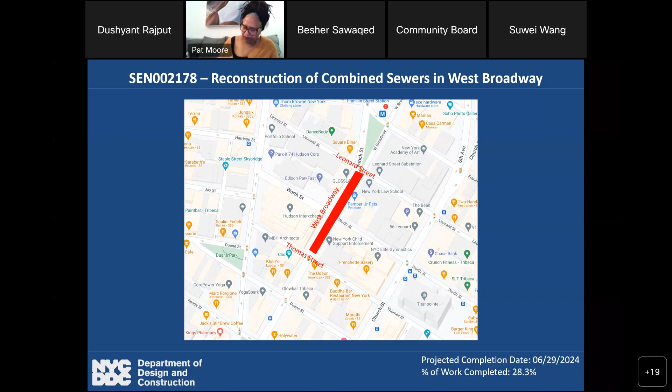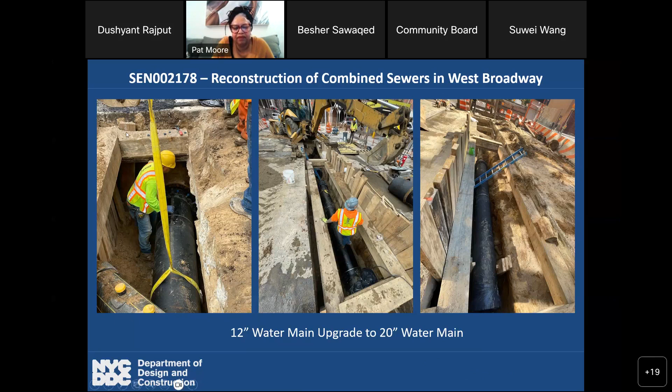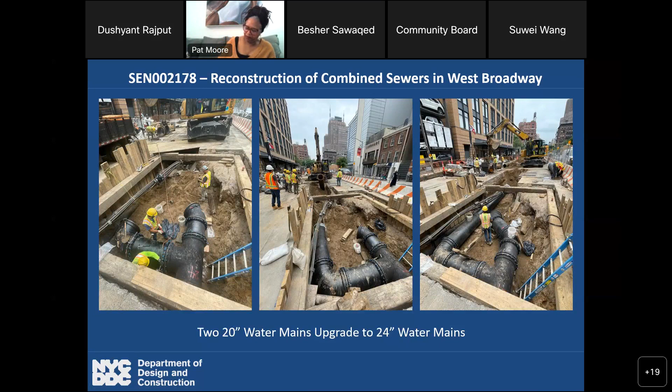Right, next photo. So this slide, it's the same thing. These are 2 20-inch water mains that are upgraded to new 24-inch water mains. So again, larger pipes, more capacity, and the old 20-inch water mains were from the late 1800s. These are more than 100-year-old water mains. This work was all completed.

So this is a plan of the scope of the project. We are actually reconstructing the combined sewers for the 2 blocks. Water main was added as an additional change order work. So as soon as the water main work is complete, we will move to reconstructing the combined sewers, building new manholes, basically from Thomas Street to Leonard Street.

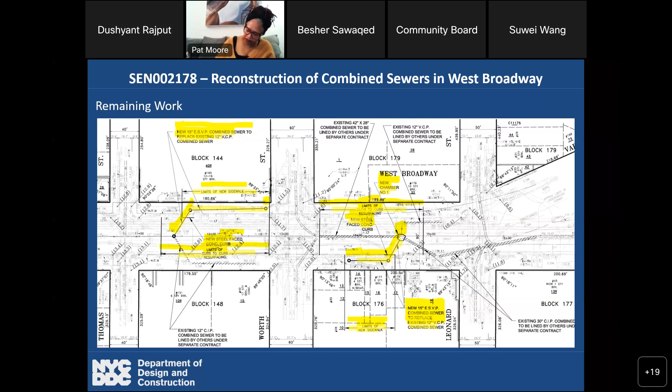Let me see. Yep, next slide. That's it. Okay, so that's it for the West Broadway project.

I have a question for you. When you dug up, did you find anything good? We always... nothing archaeological, no dead bodies. We are all good. Glad about the no dead bodies.

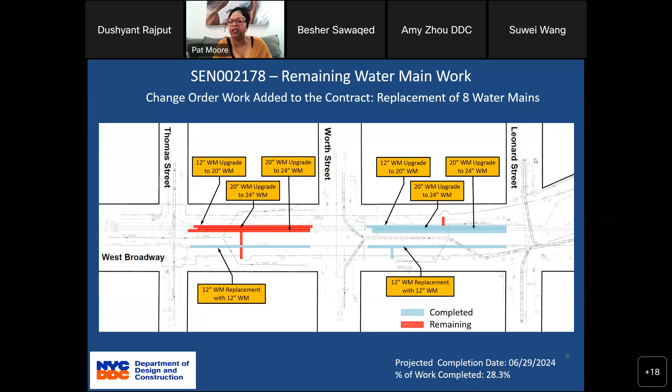Great, thank you. Committee, do you have any questions? I can't see all hands. So Brendan, I see you, go ahead. A couple of questions: are you all on schedule currently? And if not, what are some hiccups that you're running into?

So we have bi-weekly progress meetings with the contractor, and the most recent one was actually today in the afternoon. According to the contractor and everyone involved in the project staff, we are still on schedule for the completion date of June 2024.

Great, and then with the transition to this new block work, are there expectations in traffic transitions? So we are going to keep the existing MPT on the north block, and the contractor will occupy the south block. So we are going to be working on both blocks concurrently. On the north block, there are still some utility work being done by the utility company, and the contractor is going to work on the water main work on the south block.

Great, thank you. Yep, no problem. Anyone else from the committee with good questions, Brendan? Anybody else? And most of the hiccups come when the bad weather comes, right?

Yes, we had a day of delay a couple of weeks ago from the Canadian fire because of the poor air quality. We had to shut down for a day and things like that. And last year we had a couple of days where there was a heat advisory from the heat waves. So in the summer, that's something to look out for.

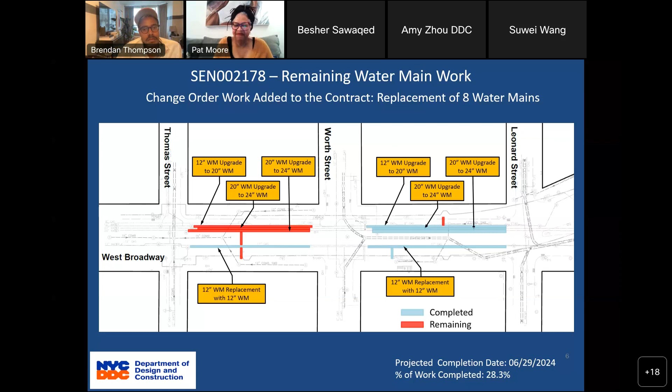Thank you. So who's next and which project? So for the next project, we have reconstruction of Greenwich Street. I believe we have Phillip.

Yes, thank you, Besher. Can everyone hear me okay? Oh, great. So like Besher said, I'm Phillip Stafford. I'm the community liaison for the DDC's reconstruction of Greenwich Street. I'll try to go through the slides quickly and then have a couple other things to touch on.

So this is a full roadway reconstruction on Greenwich Street from Barclay up to Chambers Street. Primarily, most of our work is on Greenwich Street between Barclay and Murray, and that's the only place we're working now. It's a joint bid job, so we're doing all of our water main and sewer work, and also Con Edison and ECS have money in this project to upgrade their facilities as well.

Now let's go down the list. Curb alignment on Greenwich, the west side between Barclay and Murray, the curb will bump out in 3 places, about 20 feet into the street when we're done.

We haven't seen any trolley materials yet. We'll put back the street furniture, new signs, all that good stuff when we're done. Currently installing the water main, new streetlights and traffic signals, and we've done a good amount of the drainage work so far, especially on the east side of the street. And all of this happens while we're working with Con Ed to upgrade their facilities as well.

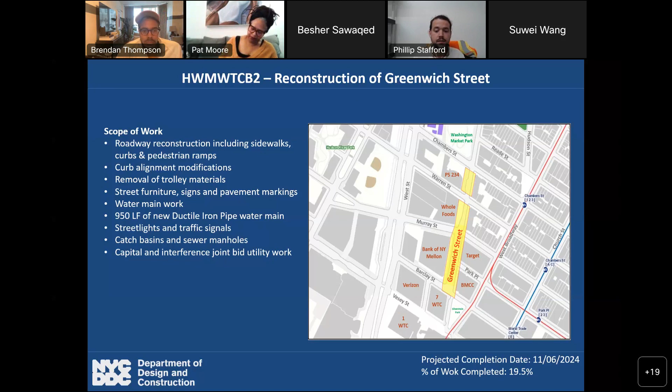You can go to the next slide. So, time elapsed is almost 50%, about 46%. Percentage complete is 19.5% - that always lags a little behind because it's based off of the payments.

For the project schedule, we're working at Barclay and Greenwich - that's a mass excavation area, meaning we open everything up and the utilities do their work and we do what we can around them. Also, we're doing a lot of work for the utilities, our contractor.

Greenwich and Murray Street, same thing - we have a large excavation, currently trying to build a new Con Ed manhole right there. And at Greenwich and Park Place, we just put in the first run of water main, about 150 or 200 feet. It's nice to see that go in.

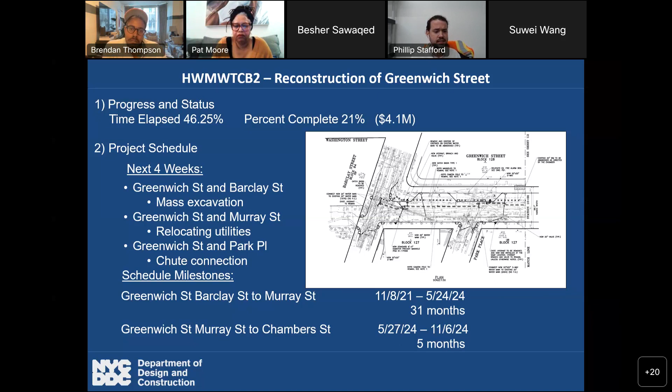Go to the next slide please. Just a couple photos on the left - that's on Greenwich, looking south, just south of Murray Street. You can see the trench for the water main, with all the utilities hanging on the left side, encased in concrete. We had to break them all out and hang them. You can see the black pipe on the right side covered in sand - that's the new water main. So we break out all the utilities, put the water main in, and put everything back together.

On the right side, that's Barclay and Greenwich, the Oculus in the background. This is our mass excavation area - you can see just about every utility that's in the ground in that photo. Con Ed is upgrading what they can, ECS is upgrading what they can, while we work around it. That's ongoing, and we plan to keep expanding that area.

That's all for my slides, but I have a couple extra things I'm sure you're interested in. Last week we met with Bank of New York Mellon's contractor for the first time in the field. We've been talking to them since the beginning, and I watched all of the transportation committee's meeting with them. I know they said they want to start in August, but as it looks right now, our work is not going to allow them to start their work immediately. So our contractor is working with theirs.

We think there's a little more utility interference with the bollards than from their plans, so we're going to let our contractors talk about it. Hopefully our contractor can do a good chunk of their work while we're working - and that would be part of a negotiation that the bank would cover any outside work, right?

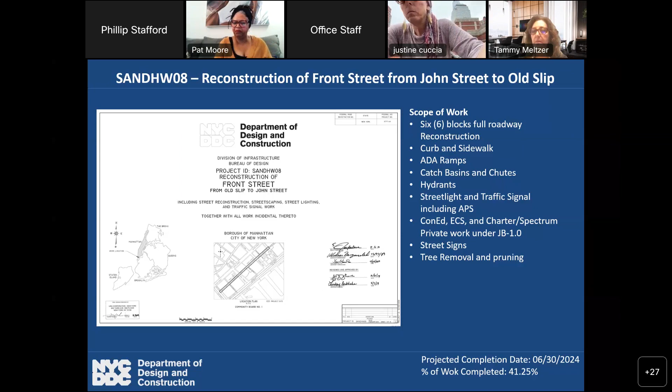Hi, this is Howie Dang, I'm the RE for the Front Street Reconstruction Project. How are you? Good, how are you? I'm doing fine. For our scope of work... wait, sorry, which project are we doing? Front Street. Oh, Front Street, right, okay.

For our scope of work, we have 6 blocks of full roadway reconstruction, curb and sidewalk, 88 pedestrian ramps, catch basins and chutes, replacement of hydrants, streetlights and traffic signals including APS. Also, this is a joint bid project, so we also have Con Ed capital work, and also ECS and Charter Spectrum private work, replacement of street signs, and tree removal and pruning. As of now, our project completion date is June 30th of 2024, and our percentage of completion is 41.25%.

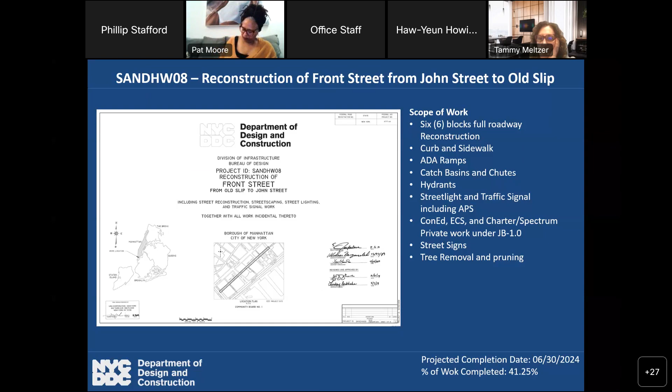Next slide please. So far, our work completed to date: we installed 9,600 feet of Con Ed electric conduits, we've rebuilt 6 Con Ed manholes, we've also done abatement of steam mains and reinstallation of housings in 2 locations, and we've relocated a steam anchor in interference with a catch basin that was on Old Slip.

So far we've done installation of 13 new catch basins with 2 new manholes and the chute connections. Also, we've completed installation of 2 new sewer manholes and replacement of sewer due to damage by Con Ed steam main. We've also done 12-inch water main at the intersection of Gouverneur and Front Street.

Also, we completed 6 blocks of trolley removal excavation. We did not find anything significant, no old trolleys. Also, we've relocated Con Ed gas facilities at the intersection of Front Street and John Street.

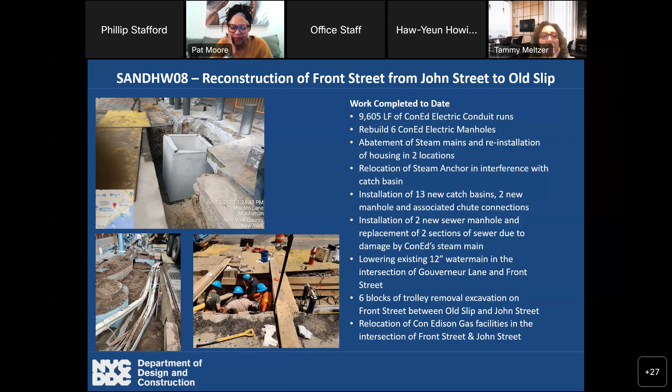And this is Maiden Lane. This is one of the pre-existing conditions we discovered, where a water main installation had damaged the sewer, brick sewer. This is one of the change orders we had. We will be working on this pretty soon. Next slide please.

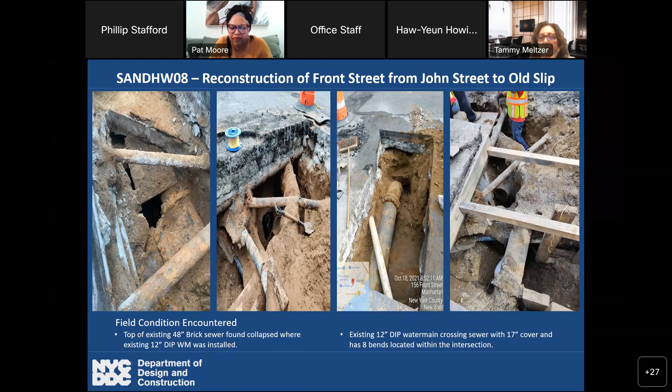So our current operation is catch basins between Fletcher Street and John Street. For work remaining, we still need to do full roadway reconstruction for all 6 blocks, including Cobblestone Street between Fletcher Street and John Street, repair sewer and install new manholes at Maiden Lane as mentioned, 13 more catch basins to go, also curb and sidewalk for the whole 6 blocks, as well as the street lighting and traffic signal.

That's it for me, any questions? So we always talk about the cobblestone, you've heard us talk about it before. So our plan for the cobblestone on this project is we're going to fast track the schedule on that first block, going south from John to Fletcher.

Right now we're doing basins. Once we're done with that, we're going to do the curbs and sidewalks on the east side, and we should be starting road base and cobblestone on that block by, I'd say, September. Does that sound correct? Maybe August, yeah, around August-September. So we're looking to finish that block, and then complete it and move south. You should have a new cobblestone roadway by early fall.

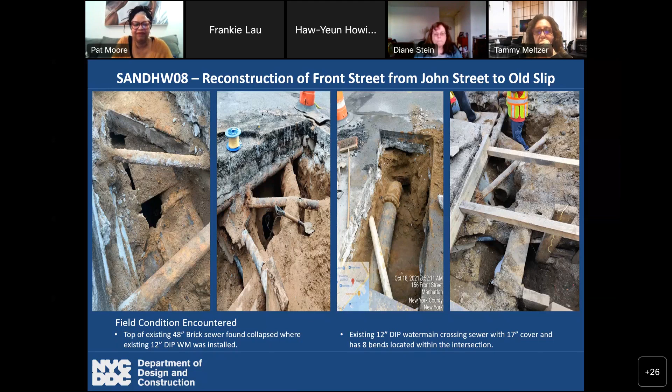So you don't have an old water main. Frankie, I believe Front Street was done somewhere between the 80s and 2000. Okay, so it's not an old pipe, you're not talking about the 1800s here. Yeah, so great, thank you Diane, you okay?

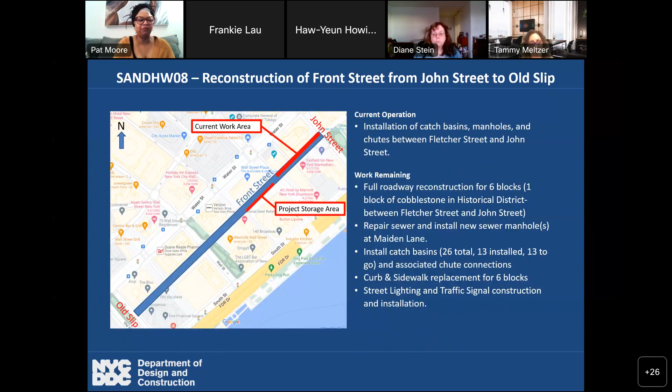That's it? Anybody else from the committee? Anyone from the community have a question? Not, we're moving to the next project, gotta move a little faster. Okay, next, who's next, and which project?

So this is the reconstruction of Vesey Street, between Church and Broadway. Projected completion date, we have it on September 17, 2024. Percent of work completed is 24.5%. Oh, it's Vesey Street, I'm sorry, I missed that. Yes, and so the completion date is when? September 17, 2024. Thank you.

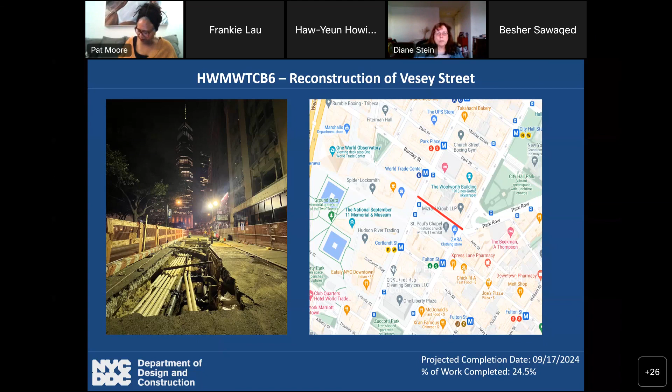As we mentioned before, our scope of work is installation of catch basin, sewer cleanout manhole, and water main upgrade. We are upgrading the water main from 12-inch to 20-inch. We're also working on private utility upgrades. This is a joint bid project, so Con Edison and Empire City Subway have their own funding to do their own work. After we finish installing the water main, we'll be upgrading the street lights, installing a 6-inch granite curb and pigmented sidewalk, and we will upgrade the pedestrian ramp to be ADA compliant.

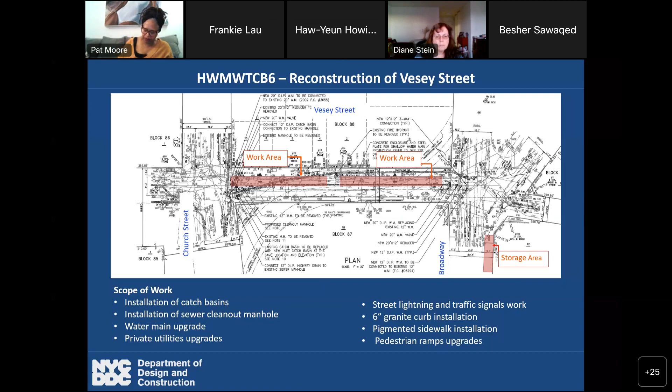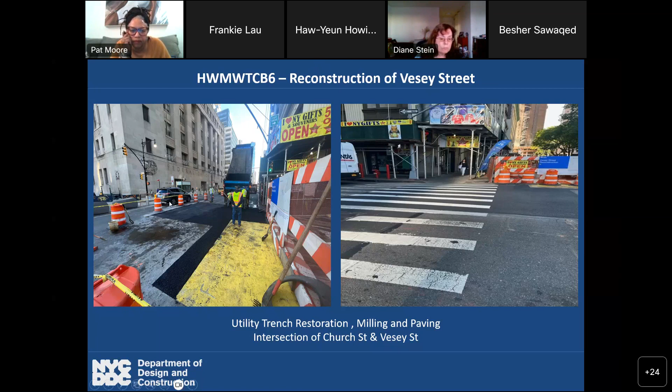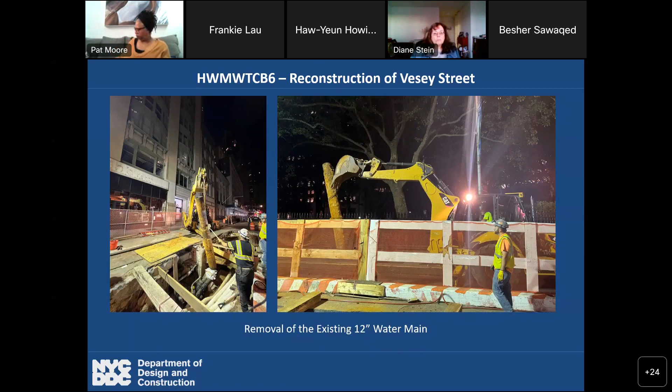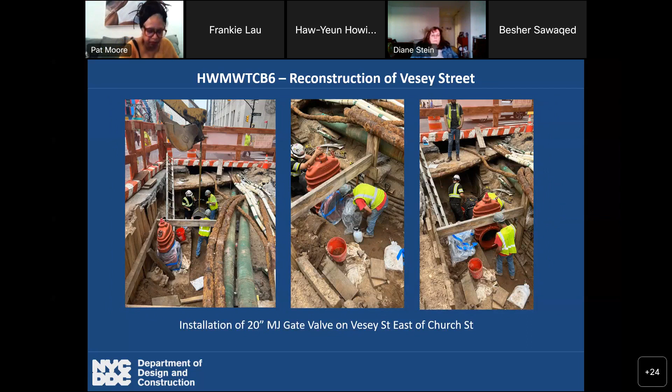So the contractor finished milling and paving the intersection of Church and Vesey Street. The utility companies requested us to locate and chase some of their conduits in order to do the upgrades, so we had this intersection milled and paved before the 5-borough bike tour. On this slide we can see the removal of the existing 12-inch water main, and here the installation of the 20-inch mechanical joint gate valve on Vesey Street east of Church Street. Here you can see the installation of the 20-inch water main, we started on the west side of Vesey Street.

During our work, and I know Chris mentioned that we should always open the road, document everything, and come back with a plan, that's what we did on Vesey Street. However, we met with Con Edison about 6 months before the start date of the project, and they came up with the layouts and some designs. When we started working on these layouts, Con Edison discovered they have some structural defects in their manholes. So even after documenting everything in the street, we always see unforeseen circumstances that delay the project. But as of now, we're still on the original completion date. Good.

And that's it for Vesey Street.

How's the traffic situation been? It's been great. We had a couple of lane closures during the weekends. However, the contractor has the flaggers, and we only do full road closures when needed, and we give the community a heads up. We work with the garage on 18 Vesey Street and coordinate everything with them. If we have one lane closure, the contractor will have 2 to 3 flaggers to detour traffic so the garage doesn't lose business.

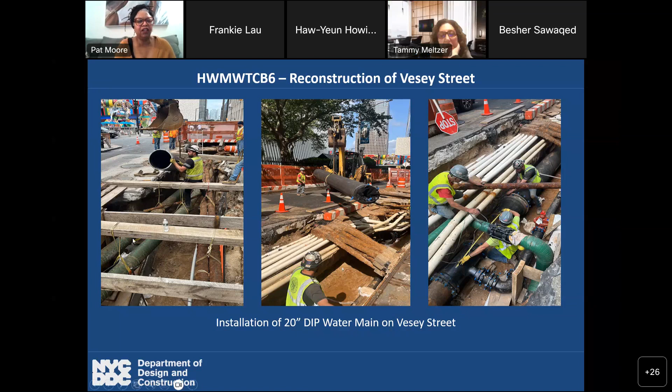Thank you, Besher. You're welcome.

Moving forward to the next project, we have Nassau Street. We have Norbert, the RE, with us today. Hello, Norbert, how are you? Good evening, everybody. So last time you spoke, I was pretty confident that we're gonna be up and running by now, but unfortunately we still haven't started officially.

But we're right around the corner. We were actually slated to start last week, but there's still a little bit of a hiccup with the DOT permits. The contractor's trying to secure all the side blocks that were not in the original stipulations, but they basically squared it away, and we're ready to start very soon.

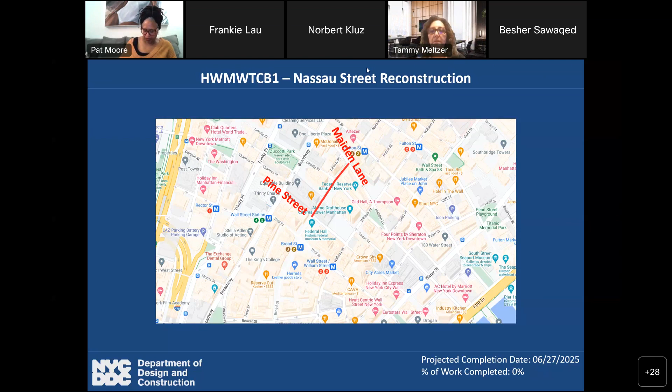Okay, you'll let us know by September. Also, we have a community member who lives right there on the corner. I think you've already reached out to her and spoken to her. Yes, and I know there was a concern last time, because we were just going to go over the scope of work again for people that weren't a part of it.

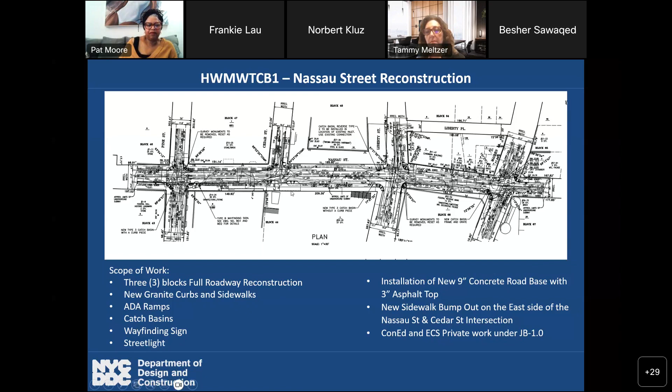We have 3 blocks, full roadway reconstruction. We're installing new granite curbs and sidewalks with new ADA ramps, installing new catch basins, a wayfinding sign, and upgrading the streetlights to the Downtown Alliance standards. And then, of course, installation of new 9-inch concrete road base with new asphalt. And like all the other projects in the area, there's a large amount of Con Ed and ECS private work.

Next slide. So last time I did mention that we were supposed to have the shutdown of the full street 24/7, but DOT, we actually are gonna have a lane open after hours. So the street's only gonna be closed during work hours, and we'll reopen it after the contractor's done for the day. So there will be a travel lane open at all times. I know that was a concern that was brought up last time, so that should help traffic at night.

During work hours, which will be between when and when? 7 and 4 o'clock. So between Pine and Cedar, Nassau will be closed during work hours, and then they'll move block by block and only have one street shut down at a time during work hours. After hours, it will be open up to traffic, one lane of traffic.

All right, do you think you'll start the project before September? Yes, I'm confident. So we won't meet with you again until September, but would you just shoot us a note if you actually get started? Yes, Tashnima, she's out today, but she's going to send out all the notifications, our community liaison, for when we start to all the stakeholders. She'll send it out. Great, thank you so much.

Thank you, I'm just going to see any questions, any quick questions about Nassau Street? Don't see any hands, so let's roll. Is that complete?

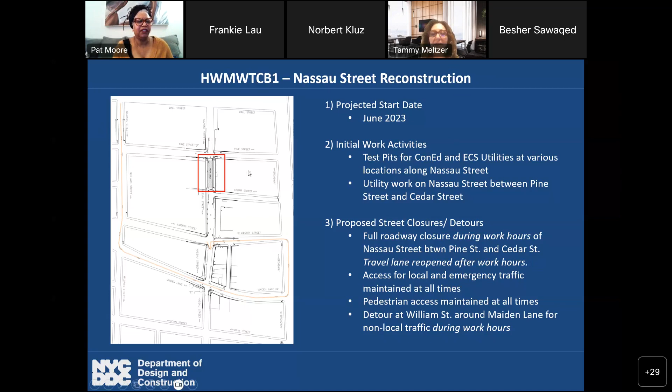Are we done with our project? There's one more, something Pat. There's an upcoming project.

Well, hi, Marlyn. How are you doing? Good, how are you? I'm hanging in there. So what do we got going? Hi, I think Dushyant is on. He wanted to talk a little bit about an upcoming project to the CB1 area as well. Okay.

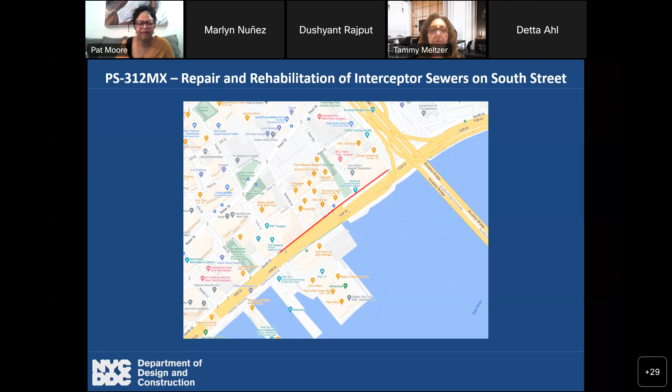PS312 MX, repair and rehabilitation of the interceptor sewers on South Street. Expected start date is anticipated in August 2023, and the location is on South Street between Fulton Street and Dover Street. The duration of the project will be 545 CCDs.

Work will be done most of the time at night, from Monday to Saturday morning, 9 p.m. to 6 a.m. The work will involve installation of the PVC spiral wound lining profile, utilizing grouted steel reinforced PVC. This is the first time we are installing this lining in New York City, and the sewer size is 96 inches wide and 72 inches high.

We are expecting the work to be only in the sewer, with very little excavation to install the bypass from one sewer manhole to another. A 12 inch pump will be running to discharge the sewer from the existing 8 foot by 6 foot sewer into a nearby sewer. This work will be performed by Coppola Services, the contractor, and we are in the process of hiring the REI consultant right now.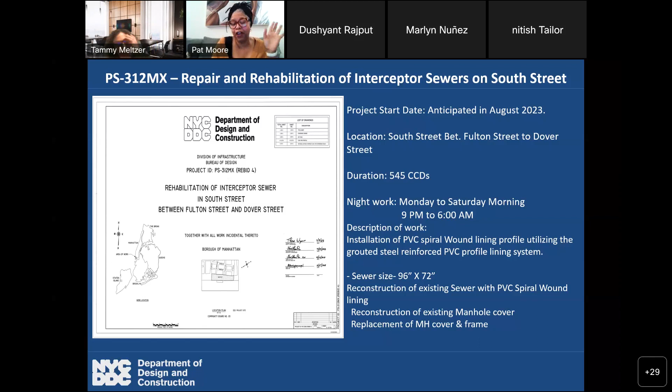If it's closing streets, you know, most of the time the projects are great and they're fine and it works out. But this one that you're starting in August, I still don't understand how they're going to access the sewer, even if they're underground. How are they going to get underground? I'm not understanding it. So we don't need to discuss it tonight, can we have an offline discussion about this?

Sure, we can talk offline and get more information about this project to you. If we can have a Zoom meeting, sure, a few, I'll get in touch with you tomorrow and we'll discuss. So if you contact the office and set up, we can set up some time to talk, because I'm just not understanding it. I'm not seeing clearly how it's not going to interfere with quality of life of the residents that live along this route.

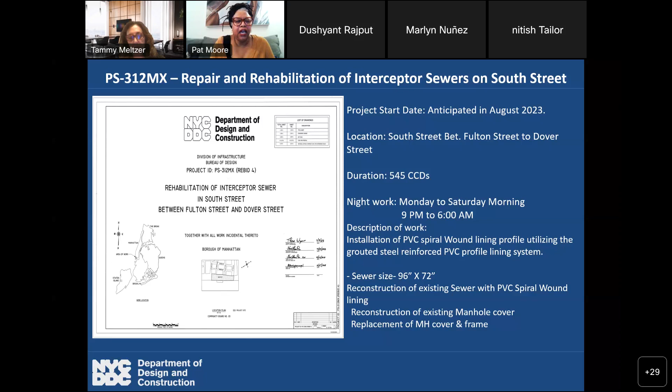There's Trinity Place? One more slide, which is the other upcoming project, the reconstruction of Trinity Place. This is further along, in the year 2023. And that one I told you last time impacts me directly.

My greatest question before we even get rolling is what connections and conversations have you had, not only with the residents on the corridor, but with the 3 existing construction projects on that street and the school at the end? I've met with CS 150, with the principal there, with Solution as well. We discussed this upcoming project, and we have been in touch with Trinity Church. We've met with them a few times during the design phase.

All right, so when is this? Do you know when it's due to start? Most likely it'll be fall of 2023. Okay, so we have some time here. Do you see a scope of work as to what's included on the project?

And what protections have you put in for the school and for the kids and families that need it? They're in a pretty precarious, dangerous traffic situation right now. Based on what kind of implementation are you doing down at the very bottom?

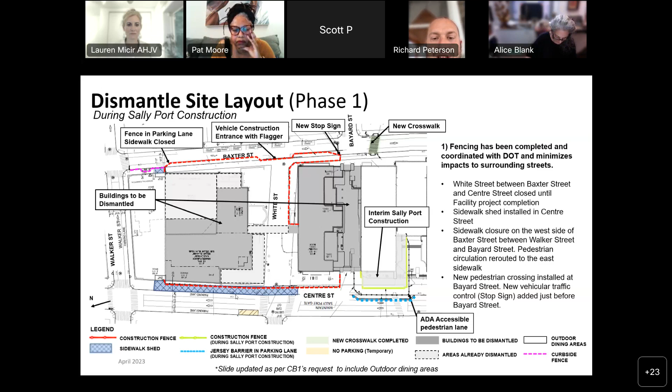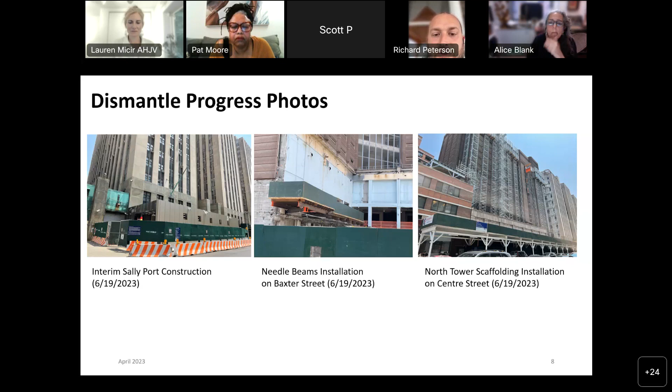Actually, Rich, I'm going to go back a couple slides, if you wouldn't mind, to this one where you were talking about the gym and the part that's already been dismantled. Could you describe a little bit more about the backfill operations? I think this is where we could talk about that one question that Alice had sent in.

Yes, absolutely. So backfill is being brought into the site for purposes of stabilizing the perimeter walls, as well as giving us a pad to stand on for the crane that is coming to that gymnasium area at the current time. The material is being sourced as clean fill, and is being brought in and placed in compacted lifts in that area in order to support the crane, and then later utilized throughout the property as berming for any vertical walls that remain.

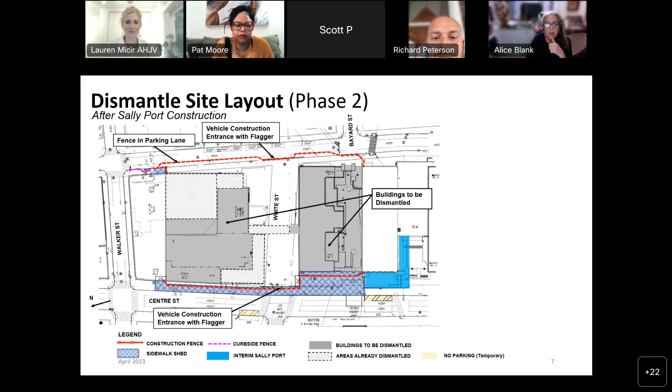Thanks. Sorry, did you already, you just did this one, right? I did the rodent control.

For those that aren't familiar, if an alarm is triggered, it's set below the threshold so that we are able to address the issue before it becomes a problem, and keep on top of our programs on the site.

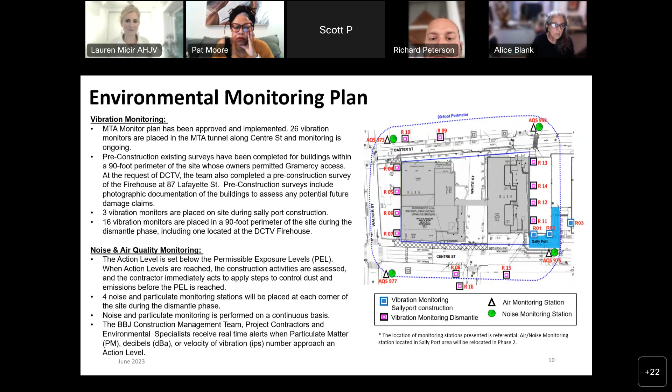We use water spray for our roadways, our trucks, and our wheel washes, any excavation stockpiles, and any areas of dust generation. We try to cover our stockpiles and anchor them with tarps to the greatest extent feasible based on load-out operations and timing. We use extra care, especially in dry periods where we need more frequent watering, and all truckloads are covered and secured before they leave the site.

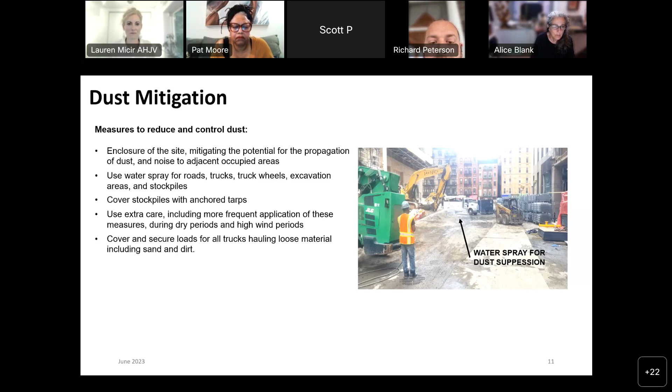Truck idling is minimized and eliminated when they're staged on site. And we try to take all of our debris and use the excavators to lower it as far into the box as possible in lieu of dropping it, to minimize the sound of the concrete hitting the metal when it's loaded into the containers.

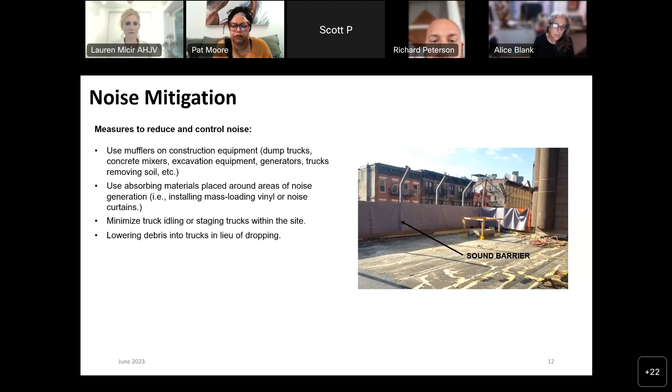In addition to doing the environmental monitoring, which we're monitoring in real time, as Rich has said, we are also committed to publishing monthly monitoring reports on our website. That's in response to a community board resolution from last year. So we're happy to keep coming here bi-monthly and providing the environmental monitoring updates here. We'll also continue to provide those at the NAC meetings and publish these reports online.

Luckily, to date, there have been no construction related exceedances. Occasionally there's something - I think we had an incident where NYPD was coming by and actually bumping into one of the vibration monitors. So of course it's noting something, but that's not actually vibrations caused by construction. It's just someone jiggling the machine.

That's why Gramercy reviews the data and then provides a narrative in these reports to clarify if we are seeing anything, what is it, and if it's not construction related and it's not a concern, why not. And if anything was going up towards any of the action levels, how did they come out on site, address it, mitigate it before it became an issue. So it takes us some time to put those together, but we publish them.

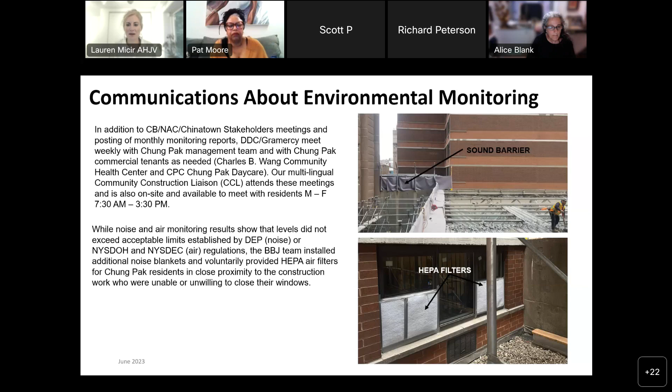So this is just to say there is ongoing frequent engagement. We're trying to stay in touch on the grounds to mitigate where we can any of these issues that arise. Of course, it's an active construction site, so there will be noise and impacts, but we're doing what we can to address this at the really hyper local level.

And here, this is providing that high level summary. So for March, April, and May, so far we're right at the end of June, so we'll be compiling the June report shortly. But for March, April, and May, the good news is we have not seen any exceedances for air quality, noise, or vibration monitoring that were caused by construction.

And again, we will be compiling the full June report and issuing that as soon as we can. We're still in the month of June, so there's still monitoring going on. But I know there were some questions around whether we were monitoring on those days when New York City was seeing all of that additional haze and air quality issues from the smoke coming down from Canada.

Yes, we were. Our monitors were online and working. We know they're working properly because they did show elevated levels and exceedances on those days that were really, really bad. It's not something we can compare apples to apples with the readouts coming from the city—it's a slightly different monitoring system, and we're specifically monitoring local construction activity and the dust coming from construction. But basically what we're seeing is when New York City was saying air quality levels were going up, our monitors were showing that as well. So we do know those are working, but those exceedances were due to the smoke coming down from Canada. We weren't doing any different or extraordinary or dust-causing construction activities at the time, so it was not due to work activities on the site.

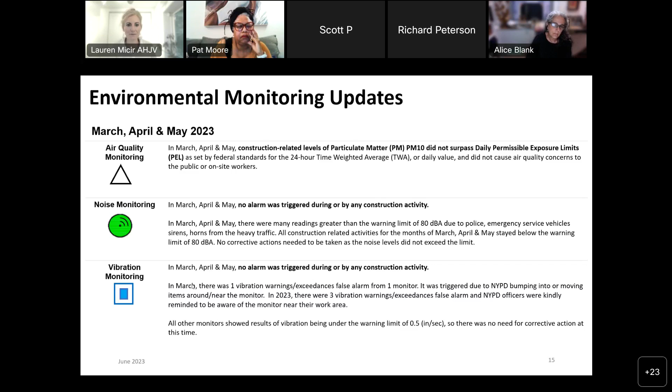Rich, I'll hand it back to you. I know we've gone through this slide a number of times in these meetings, but if you just want to summarize the asbestos air monitoring.

Yes. Asbestos air monitoring has been, we haven't been doing any asbestos work in the past month. So as of now, there's no new information to report, but we do monitor all of our work areas with air monitors. This way we are aware if negative pressure is dropped or released, and if any fibers were released from the work area. So we had none on this project, and we're not doing any abatement at this current time.

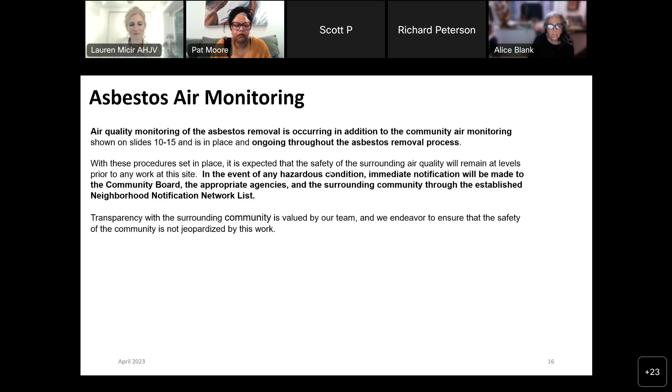So for any confirmed construction incident, or something unrelated to construction, NYCEM, that's New York City Emergency Management, is the agency that takes the lead on handling this. They'd be notified by us if it's something on our site. They would then in turn notify DOB or any other agency that needs to be involved with investigating and handling that incident. If it's something that would affect or could potentially affect the surrounding community, NYCEM again would be notified and would take the lead in notifying agencies according to their established protocols.

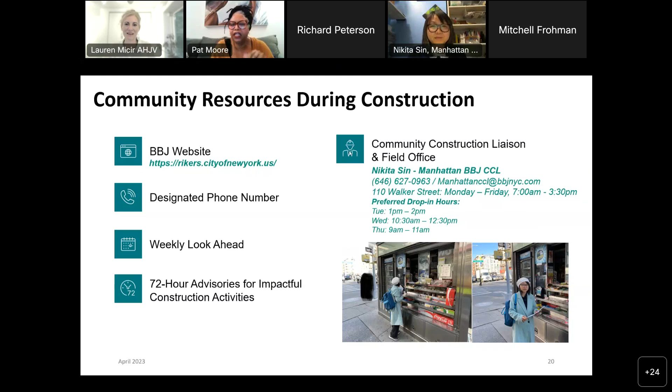I see a couple hands raised. Are there questions? Hi, Nikita. Are these questions for Nikita specifically, or are they? I see Andrea, is that Andrea? I'm sure there's a variety of questions, Pat, for a variety of people. Let's just take them in order. I will go last.

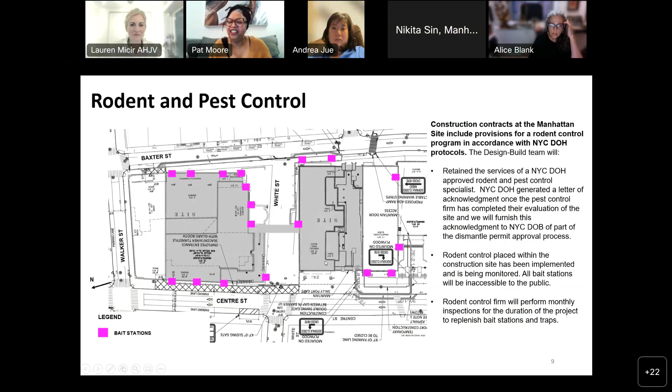I had three quick questions. Two were just clarifying questions about some of the stuff on the slides. As far as the crane goes, is that going to be mounted to the side of the building? Because you were talking about firming up the ground. Is that something that's removable?

Rich, can you speak to that? Yep, absolutely. It is a crawler crane. It is mounted on the ground under its own tracks, so it has the ability to lay down in any storms or inclement weather, and it's able to access the parts of the building that we need to access.

Got it. And I assume there's a plan in place in the event of inclement weather, because there have been crane collapses in the past in the city. Yes, there are crane protocols built into our permits for how we lay the crane down and where we place it during inclement weather.

My other question was the Sally Port. That's for which building? It's not for the ones being dismantled, since there's still an active jail. It's for the courthouse. I'm not in DOC operations, but it has holding cells for court dates that people in custody have to attend.

My last question was, other than asbestos, what other contaminants are the air monitors seeking? Dust, particulates in the air. We have air monitors outside our asbestos work areas, where we use duct tape to seal plastic together creating an airtight seal to maintain negative pressure inside abatement work zones. Outside those zones, we place air monitors with pumps that suck air through, and if any asbestos fibers are caught, we're aware of them and can address any break in containment. But that's separate from air monitors for dust.